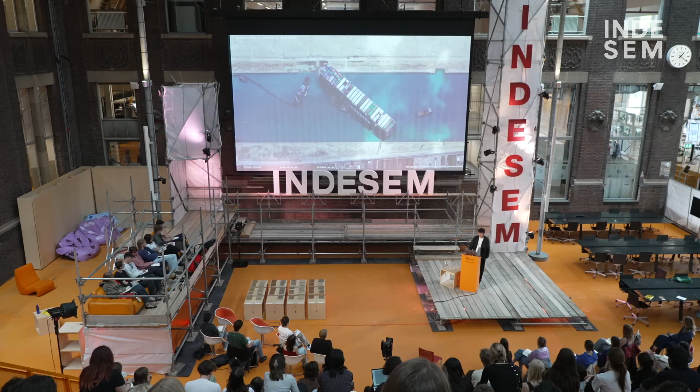So that day, because of the wind, that boat rotated, pivoted, and blocked the canal. It blocked the canal for 6 days. And every day the boat was there, $10 billion of the global economy was paralyzed. I think this is important because it shows to what extent we are vulnerable and exposed to a planetary condition of the market.

It's quite crazy if you think about that, right? So all this waste, spatial waste, is not intentional. They are externalities. Externalities, that is, indirect consequences, negative consequences that happen when you want to achieve something. When you want to do a production process, and in the middle of the way, you generate things that you don't want to generate. This is our externalities, far beyond the globe of the Earth.

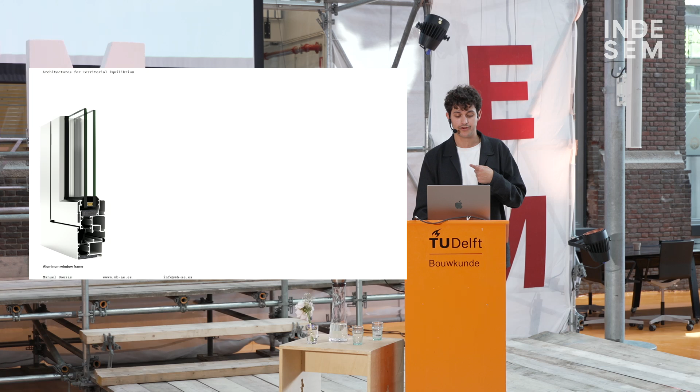But today, externalities characterize in a way the construction industry, an obsolete construction industry. For example, you probably know this—this is an aluminum frame. In all Europe, we have a lot of aluminum window frames. But what you probably don't know is that for every kilogram of aluminum that we generate, we're producing 2 kilograms of toxic waste. This is another externality.

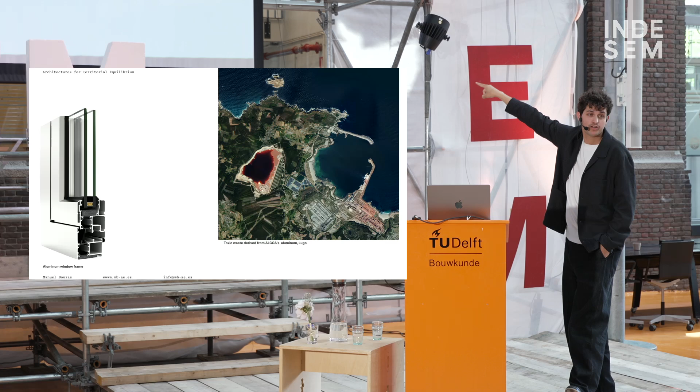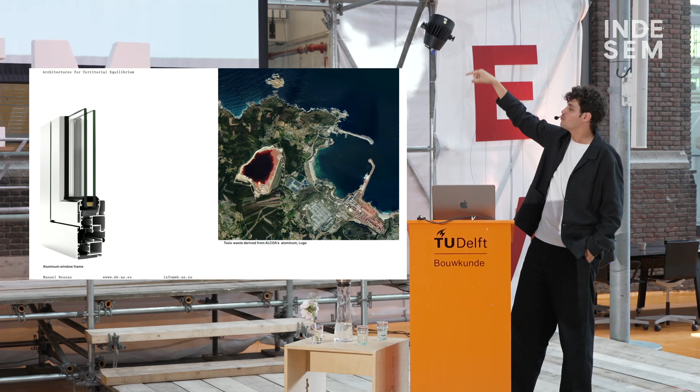And this is something that is very close to me. I come from Galicia, north Spain. This is the factory, the biggest factory of aluminum in the region. It's called Alcoa, that right now is decommissioned. And you can see how the size of Alcoa is as big as the size of the externalities this factory generates. This is a red pond with all the toxic waste, 2 times the weight of the aluminum, that is there. And nobody is going to remove it from there because it's super toxic.

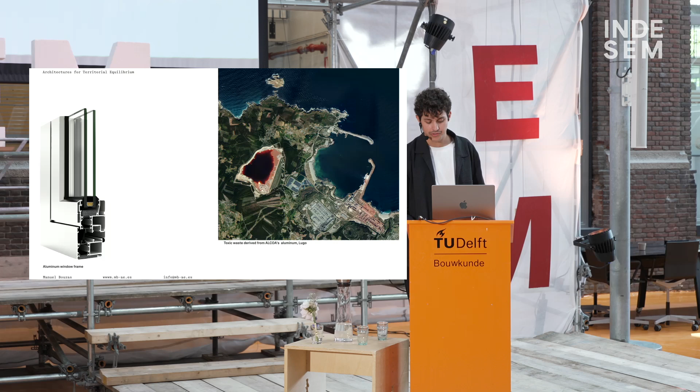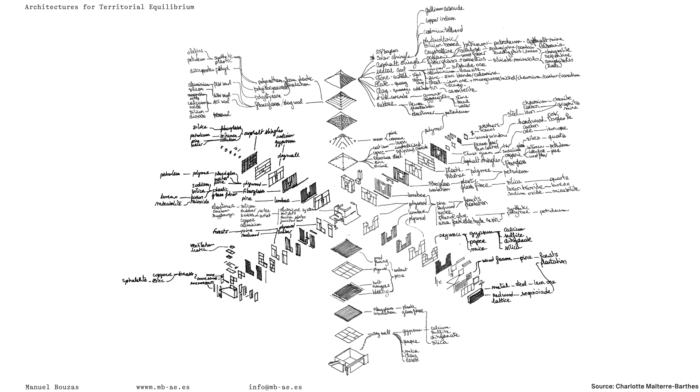This is the externalities that we produce in the construction industry. I love this drawing by Charlotte Malterre-Barthes, a Swiss architect, that in a way asks, at what moment did we arrive at such a complex construction industry? For designing a house, you have to rely on such a big amount of materials, a lot of layers, super complex, super technical—for the thermal barriers, for the waterproofing, for the insulation, et cetera—that makes this industry extremely complicated.

So if this happens with aluminum, imagine what happens with any other single material involved here: steel, concrete, glass, plastic, et cetera. This is a production process that is extremely opaque, extremely black-boxed, and super difficult to trace back and to analyze. And this is the context where we have to intervene.

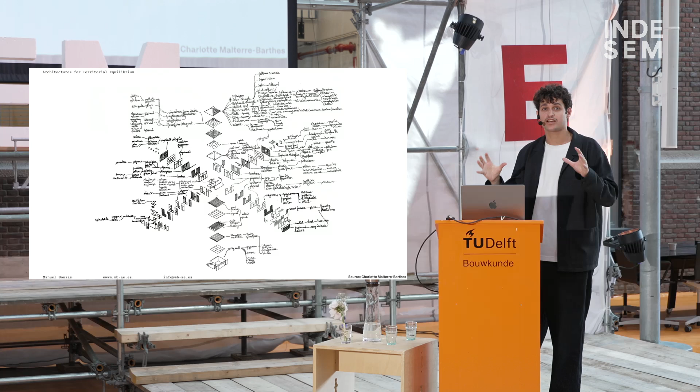There are the externalities produced when we extract materials in a violent way, when we burn energy that is imported from elsewhere—this is the most pollutant factory in Spain, which is in Galicia again. The labor, when we displace this labor to the other side of the world, those people that build our materials, where we build with, or craft the clothes that we wear. Or even the residues that we generate through the demolition process, or finally, the emissions, which is the last consequence of all these impacts. And that makes us live in a moment, a historical moment, of climate crisis that explains where we are here today.

And this is the future, right? By 2050, we'll be generating between 44 and 53 billion tons of CO2 emissions, and at the same time, there will be 10 billion people on the planet.

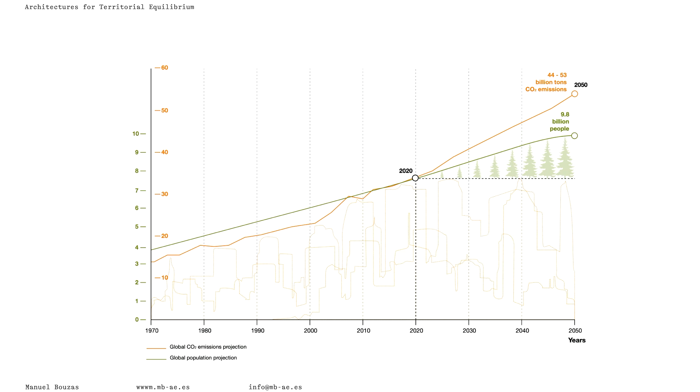And if you cross paths, you will see that that triangle is an area of opportunity. We need to build more, right? There is a pressing necessity of building more housing in the cities, and we have to do it in a way that we curve this emissions curve back again.

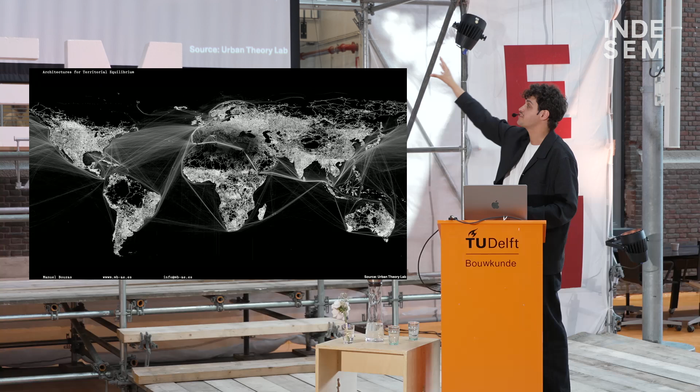So it's not only about talking about net zero emissions, it's about talking about positive impacts on the environment. How can we create buildings that serve as carbon depots, in which way we can absorb more emissions than we release. So in a way, there's an opportunity here to understand planetary urbanization like this, extremely complex, extremely hyper-connected.

And the way of doing it is looking to what we have available locally, immediately. So if we erase or turn off that layer of connections, we will see that every single country in the world has their own resources, their own material palette, their own intelligences. And it's a responsibility, it should be in our agenda to mobilize that.

So in a way, we should talk about the contrary to the externalities, which is what we define as internalities. So instead of extracting materials violently from elsewhere, we should think about harvesting them.

And this connects in a way with the timber industry that spans 30 years long, but can provide a regenerative material that can substitute concrete or energy. Instead of burning it, generating emissions, we capture it with wind, water, and sun. And this is what is happening today in Spain, with a major energy hub, or labor.

Instead of displacing it to the other side of the world, what if we support them? All these people that work with earth, ceramic, clay, like you have been doing today here. Or the residues—what if we start to think not about recycling, but upcycling, bringing more value to what is considered waste? Or finally, the emissions—what if, by working with what we have available, we can actually reduce emissions in certain places?

And this is what internalities is about. It's a word that does not exist. You will not find it in the dictionaries, but we propose that it should be interesting to consider it in our vocabulary. And we define it this way: an internality is this boundary system where the arrows, instead of going outside the ecosystem, are going inside.

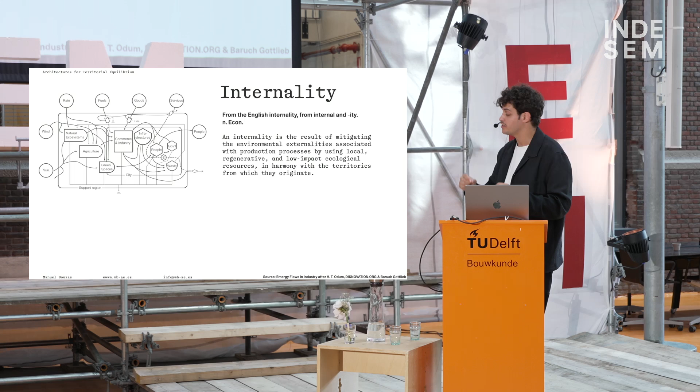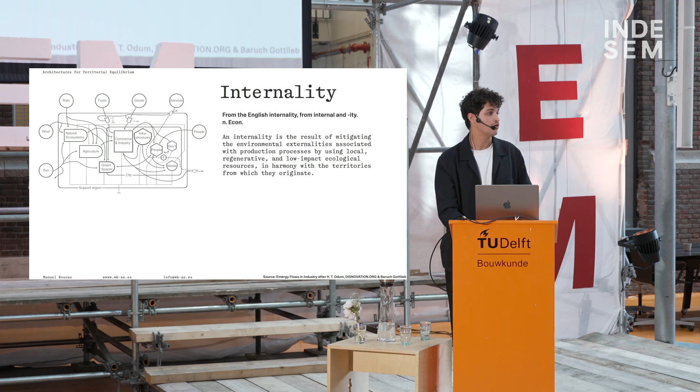So an internality is the result of mitigating the environmental externalities associated with production processes by using local materials, regenerative materials, and low-impact materials in harmony or in balance with the territories they come from. And this is, in a way, the goal.

So I'm going to present today 5 projects that are addressing that question, right?

This one is internalities, which is the Spanish pavilion at the Venice Biennale that we opened 2 weeks ago. 2 weeks ago, we were there with all the participants, 50 participants, architects, photographers, researchers from the north, east, west, south of Spain, and we were celebrating the culmination of 8 months of work trying to define that word.

This is a work curated by me, of course, but also my colleague Roi Salgueiro, and I want to thank him for the hard work all these months. And basically we wanted to address or to represent how Spain is doing things differently.

So in a way we collected evidence to demonstrate that this word makes sense. And we selected 16 projects made by architects from Catalonia, Basque Country, Madrid, Balearic Islands, Galicia, Andalusia, etc., that support our thesis. This is our evidence. This couldn't be made 5 or 10 years ago because this evidence didn't exist.

And here you can see buildings made with wood, with timber, with stone, with earth, even with recycled materials. For social housing, for landscape architecture projects, for renovation of chapels, for public buildings, etc., etc.

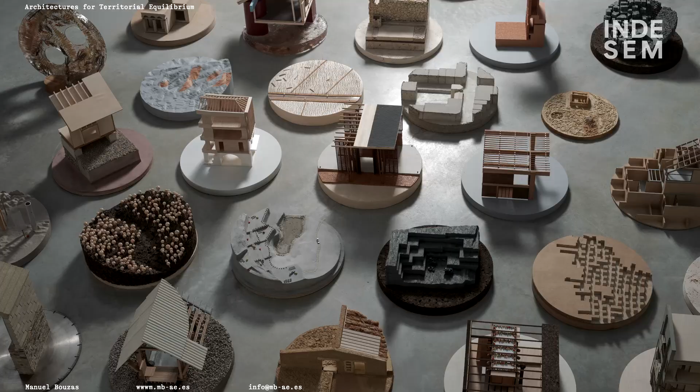And they knew how to do it, that's easy. But we asked them about the other model—the model of the landscape where this material comes from. And they were like, well, I don't know. I more or less know where it comes from, but I'm not really an expert on this.

So we asked them to try to be an expert, to do a model that represents the ecology that takes place in that territory. So after a lot of research, they created the models of the quarries, the forests, the soils where these buildings come from. It was an incredible experience.

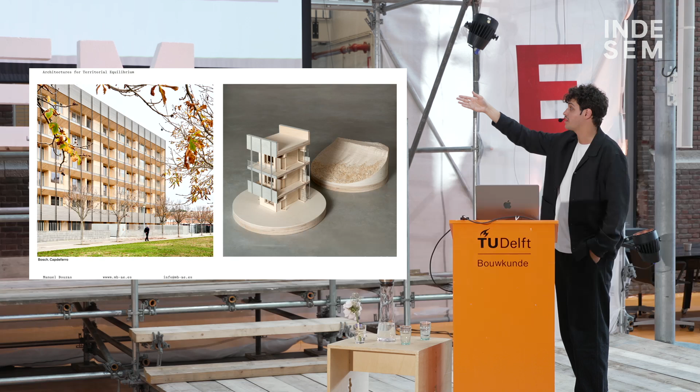Because we have projects like this made with mass timber, like Bosch Capdeferro, social housing, and they have the model of the tectonics of the mass timber, but also the models of the forest where this timber comes from in the Basque Country.

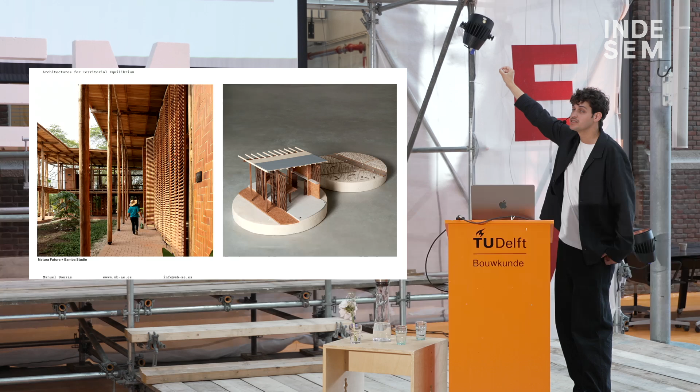Natura Futura and Bamba Studio created this cultural hub in Ecuador. They are Spanish architects operating in South America, working with raw logs. They represented both the tectonics and the forest, extremely close to the building, of wetlands, where these trees are cut. Then there are people that work with earth.

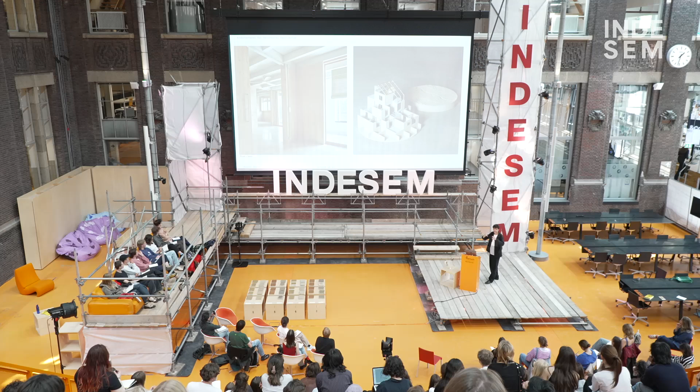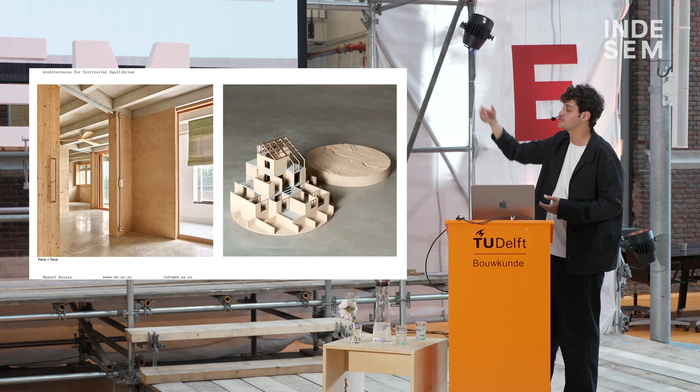This social housing project is made with compressed earth blocks, called Pet de Terra. The architects represented not only the units that define this housing spatial thing, but also the river that delivers that clay, that earth, that allows a new industry to be possible. Earth that sometimes comes from the very place where the building is located.

And this house is made with another type of rammed earth construction, where the earth is directly excavated from the plot. They actually represent both things. Or a stone — it's not only about architecture.

There are people working at the scale of urban design too. These architects, Branco del Rio, created a carpet, a plaza, that connects the different villages in this town in Portugal. They represent carefully that village, but also the quarry where they sculpted all these pieces.

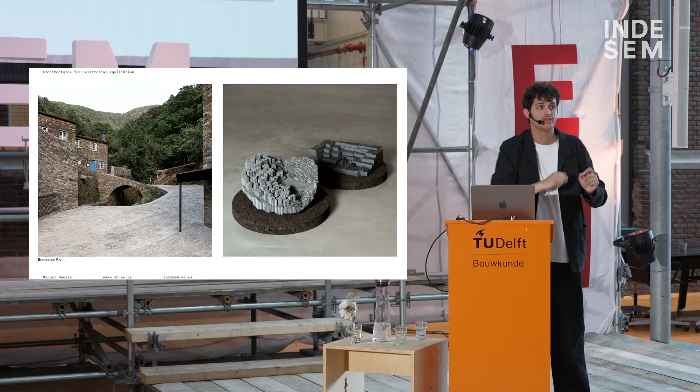Or this chapel, about completing a ruin that was there in the north of Spain, in Zaragoza. These stone blocks are cut digitally with robots, etc. They got the saw that cut the blocks and brought it to Venice. That's where the model is located.

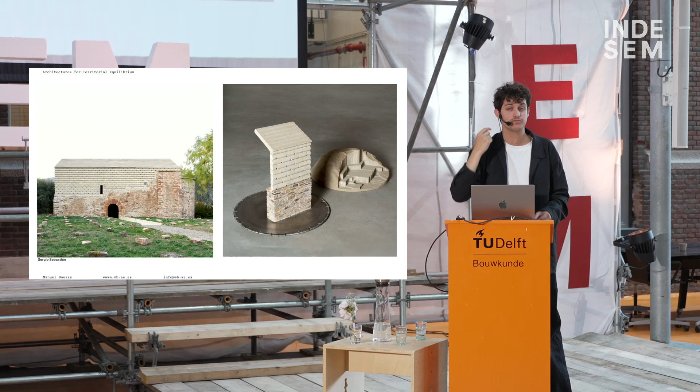And the quarry — they had no idea how to represent it. So they went to the masons and asked them, can you actually sculpt it? They have the quarry in the back of their heads, they know their landscape, so they actually sculpted it and gave it to us to bring it to Venice.

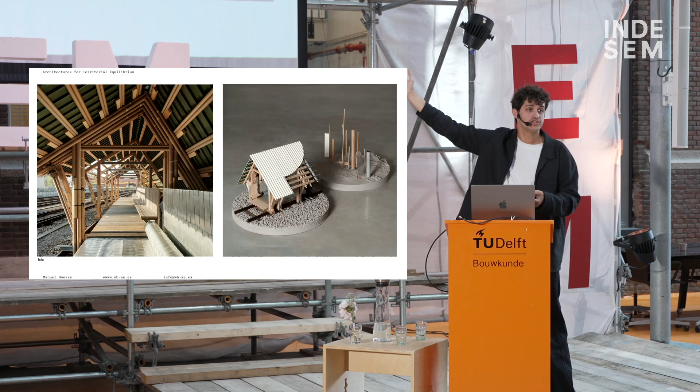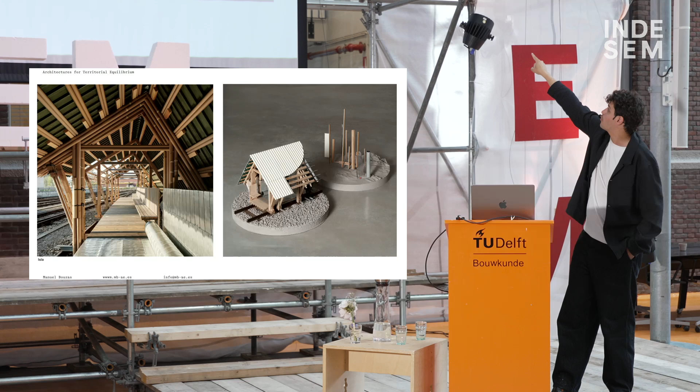Or this one, that is about recycling. This is a heterogeneous construction made with cardboard, steel, wood, made by Isla in Switzerland, Spanish architects operating outside. They represented it with the territory it comes from. In the Alps, in Switzerland, they put every single material from the exact place where they sourced it, from all those depots in the metropolitan area of Basel, with that red dot, like Google Maps, saying hey, the project is located here.

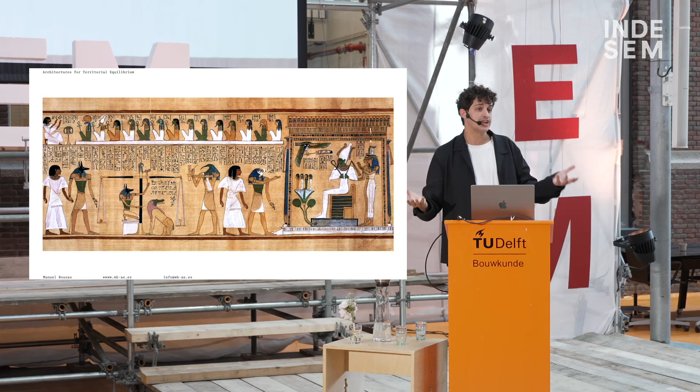And how to present both models? This is where we came up with the idea of the balance, the Egyptian balance, that for many millennia was a symbol of balance, equilibrium, but also justice. This was the message we wanted to deliver in Venice: environmental justice. So we designed our own scales, made with timber, presenting two plates for the two models.

We built 16 of these scales, extremely big — they were like that, very intimidating. They presented both models, delivering a message: the space we construct is as important as the space we deconstruct. We, the architects, and all the building industry, should put the same care and attention in both things. Models were located on their plates, and people could actually look at them 360 degrees, from every single angle.

And we tried to work in the same fashion. If we are asking them to work this way, we should do it the same way. All the wood, all the timber we used for those scales, sourced from a very special place for me: the common lands. Common lands are Galician forests that occupy like 20% of the territory, managed by rural communities that take care of their forests.

We asked them, can you give us 3 trees for the whole exhibition? And they said, of course, it will be an honor. So we asked them to give us those trees, and we documented every single step, from the cutting of the tree to the manufacturing in the factory, to the carpentry moment where these scales were assembled. So we perfectly knew what trees we used and who was behind it.

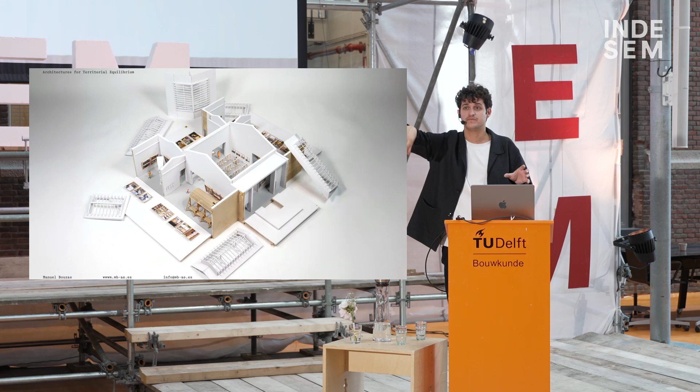But the exhibition was not only about that. We had 5 other rooms surrounding the central room with the scales, and we delivered some research projects. It's quite cool to understand an exhibition, a Venice Biennale, as a platform where to deliver some research, to create some knowledge that didn't exist before.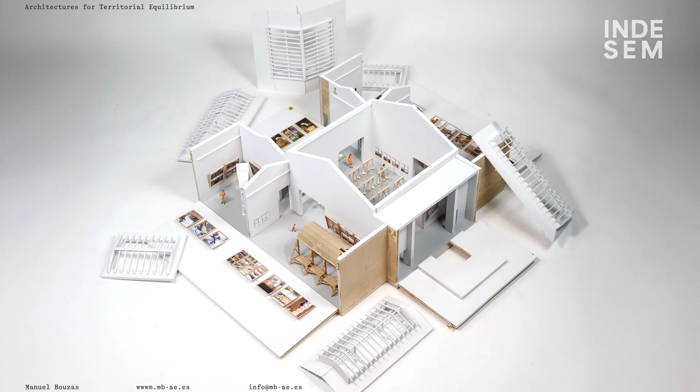So we selected 5 teams to present a research project connected to a specific region of Spain - Balearic Islands, Basque Country, Madrid, etc. - working with only one material. Tell us about those landscapes. Tell us about those processes.

So the first team looked at the timber industry in the Basque Country that is fueling a new paradigm in construction in Spain. Mainly, most of the timber buildings you'll see in Spain come from here, from the Basque Country. They presented totems investigating advances in the future of this industry, and a visual essay documenting all the steps necessary - it starts 30 years ago when you plant these pine trees, how you cut them, how you create these CLT panels that culminate in all the buildings I showed you.

The second room was about the second axis of externalities, the energy. These architects, Star and Luis Diaz, created a model of a river. Have you ever seen a model of a river? It's not just a line, it's a lot of complex lines. Their main argument is that this river in Galicia is not just a natural ecosystem, it's an energy ecosystem.

An energy ecosystem that 50 years ago looked like this - this is that coal factory I showed you in the beginning, the most pollutant factory in Spain that today is decommissioned. If you go to the origins of that river, something is going on - this is where the river starts, and you'll see that wind farm on top of the hill that speaks to this energy ecosystem. Downstream you'll see hydroelectric dams that generate more power than they consume. And finally we go to the third room, called labor.

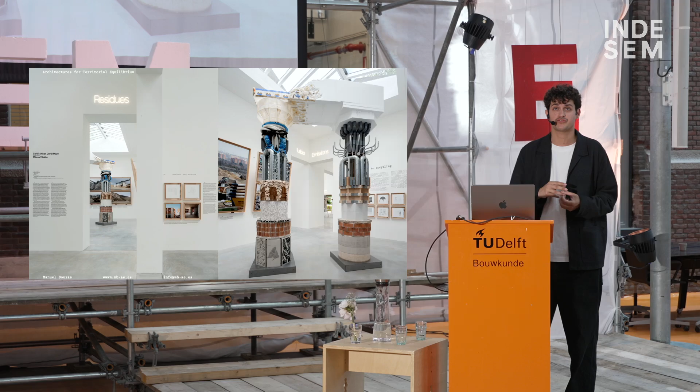The fourth room was about residues, placed in Madrid. Lucas Muñoz, who is not an architect but an industrial designer, said one very interesting thing: what if Madrid, which doesn't produce any resource, what if we talk about recycling all the waste we produce? So they created this ornamental, postmodernist, very funky portal, and made this big statement - this is ornament and detritus, like the Adolf Loos essay.

They presented all the detritus collected from the streets of Madrid, where speculation is taking place. It's very frequent to see these containers full of waste, and every day they were selecting materials to build that ornamental door. They visited all the places connected to our recycling industry - places that are very dirty but necessary to analyze, to see how we transform all those things to make it possible.

The last room, concluding the Imaginaries project, is about emissions, focused on the Balearic Islands. Imagine if this is difficult in a European context, imagine on an island. These guys, known as IBAVI for the last 10 years, have a presence in El Croquis magazine. They've been looking at what they have over the last 10 years and discovered an amazing amount of materials there - stone, earth, timber, etc. - and they have to work in favor of those materials, not against them.

So this led them to the point where they are working with arches and vaults and an architecture that speaks about solidity, weight and gravity. Why?

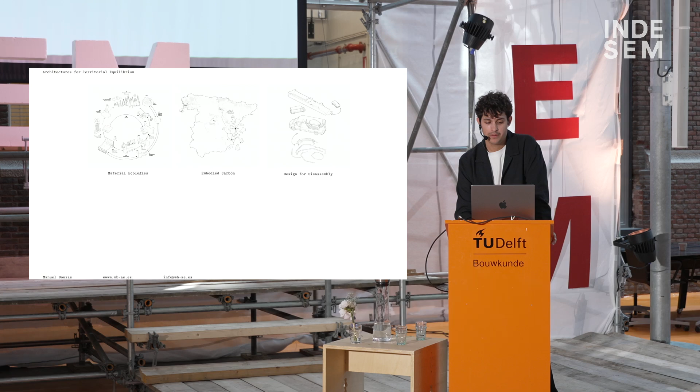But at the same time, I think it's important to consider other things. In my work, you'll see that it's important to reactivate public space, to experiment with new structures, and to design through making. I've been involved with my hands in many of them.

This is the place where I used to work, this workshop, before I moved to the US. It's quite cool to fabricate with your own hands all these things. This is where I developed my passion for wood and timber.

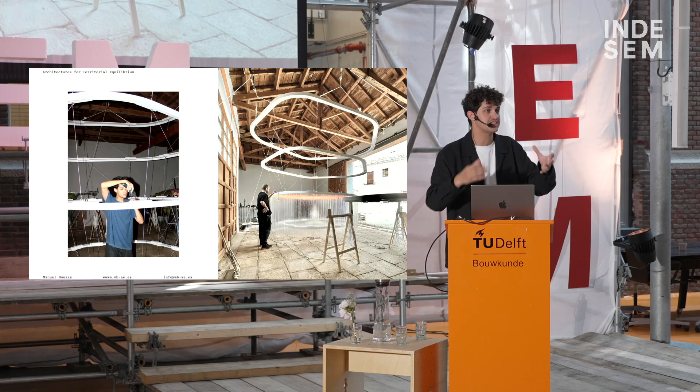We started by doing very small projects, with very little resources, when I was a student, working with my friend Santiago here in that workshop with our own hands. We crafted this lamp that was installed in the courtyard of a monastery in Catalonia.

Or working with recycled elements sometimes, like these red plastic cups that we gathered in Mallorca, and we created three catenaries that filled the space of another palace in Mallorca.

Or furniture—we designed furniture made with wood, again for a palace, in this case in Rome, in the Villa Medici. Furniture that can be used in many, many ways.

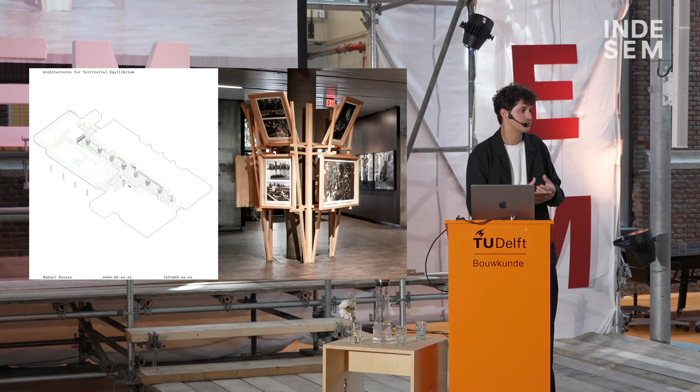Or even exhibitions that have to do with timber and forest, which is something I'm very passionate about, that we presented at Harvard. But I'm going to focus on three projects I've been doing in the last years, extremely quick, that in a way embody all these questions I want to address.

So the first one is the Mediterranean Pavilion that was built two years ago in Valencia.

It was built in this square, an obsolete public space, the result of a demolition, and there was absolutely nothing there—no shadow, no benches, no vegetation, no water, nothing. The question the festival prompted was an open call, a public competition, asking every single young architect in Spain: what can we do here to transform this space into something alive again?

So I started to become obsessed with what they already have. In Valencia, they have these beautiful Mediterranean shutters—that's what gives the project its name—very characteristic of the Mediterranean basin.

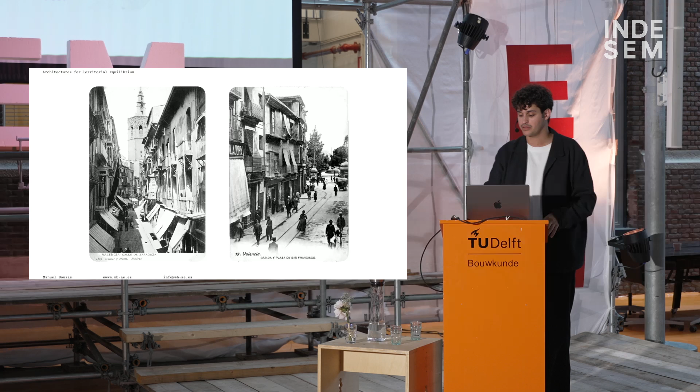It's not frequent to see them today, because right now we rely on fan coils and things like that. But traditionally they were used to protect you from the sun while allowing cross ventilation. We became obsessed with this material because it's actually produced there—in Valencia, they produce 90% of the shutters that get exported to the whole Mediterranean basin.

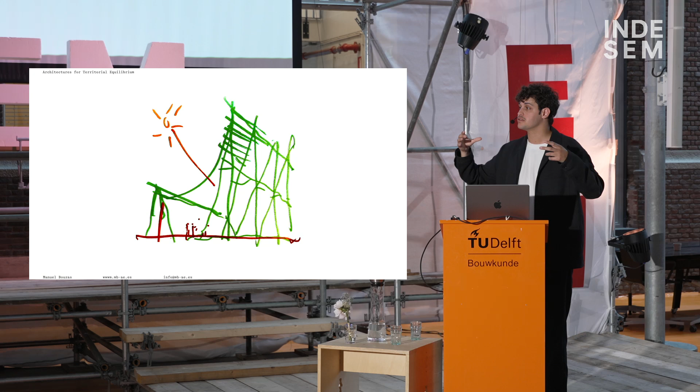The question was, how can we upscale this idea and make the biggest Mediterranean shutter ever—a shutter that can cover a whole plaza, moving from the scale of the window to the scale of the plaza. We represented it with a model that speaks how ideas can be upscaled from the window to the facade to the plaza.

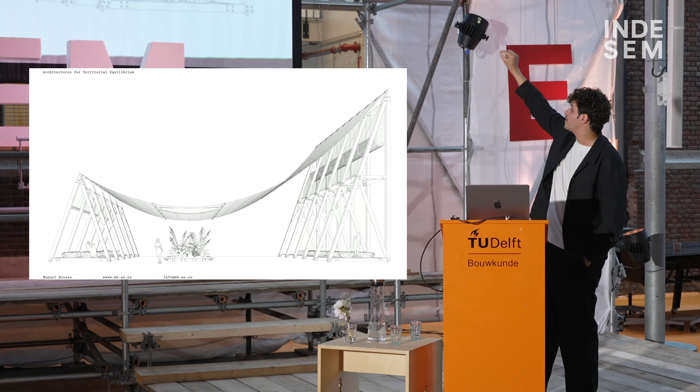And again it was this idea of the catenary, a lightweight structure that hangs from two wooden porticos and casts this immense shadow on the plaza, 300 square meters, where people can develop other activities and come together as a community.

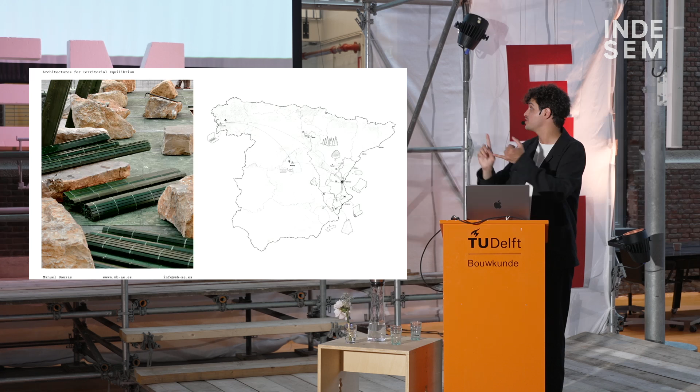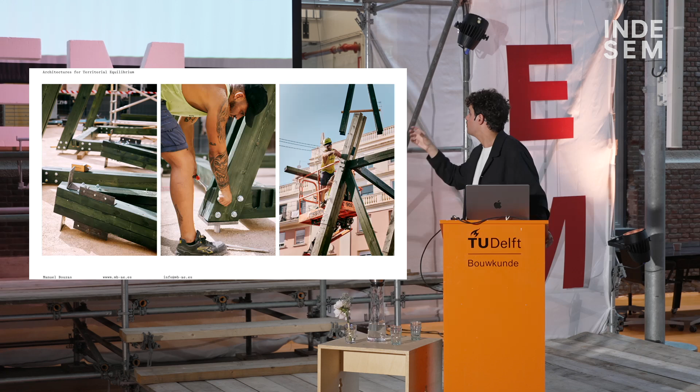We sourced all the materials—the shutters, the stone, and the timber—from just 300 kilometers away. I put a lot of emphasis on being scientific with this, and everything was designed for being disassembled. In only 2 weeks, we constructed this pavilion using only timber and steel connectors.

Some moments like this one, the stone floating there. And this is the result: a big canopy that covers the entire plaza with rocks that structurally balance the weight of the catenary, where people can gather as a community.

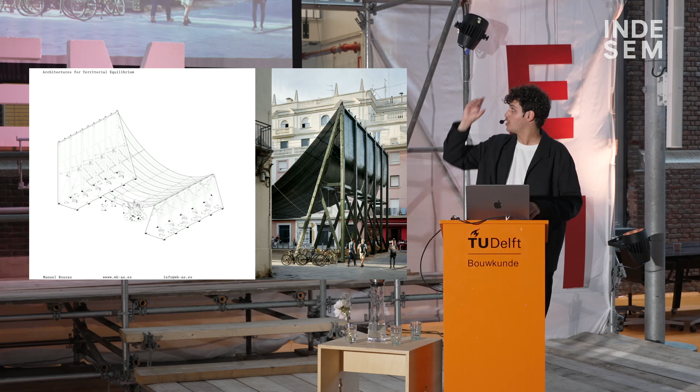They can sit there and enjoy a good climate, because it's extremely warm in Valencia in the summer. It constructs that facade in the street at the level of the adjacent buildings, where people can freely occupy this space and make it their own.

They were doing talks and conversations, parties, even a band. I love this picture because the band is wearing green caps in honor of the green color of the project. But there was one problem here—I did my carbon calculations and realized something.

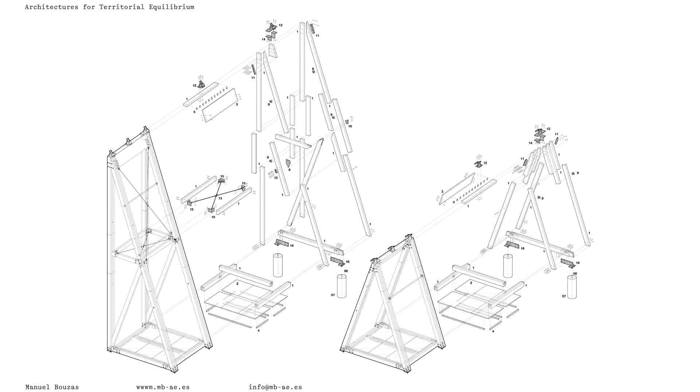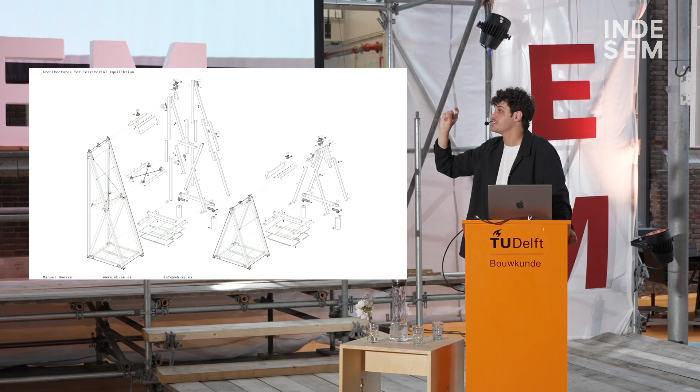All the CO2 emissions we absorbed by using timber were offset by all the emissions released by the steel connectors, these dark gray things. These little things release as much emissions as we absorb with timber.

This was probably the most beautiful place I've ever been—another gift of life. They asked us, for another festival, to do an installation in one of these gardens. There are 16, designed by Ferdinando di Medici 500 years ago.

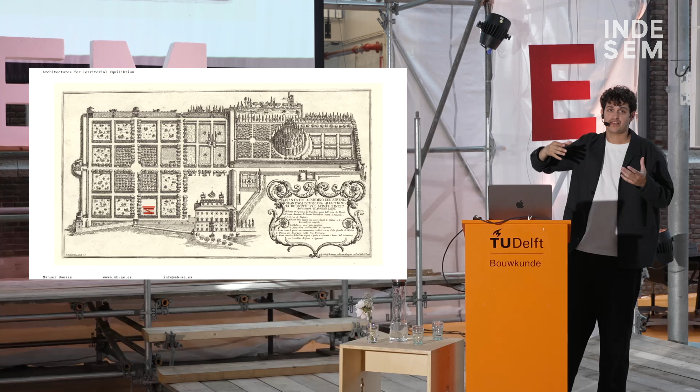In these gardens they used to cultivate all the food and necessary products for life in the palace. When you look at the maps you can see these 16 square gardens, but when you go there, you never see that—you never see the ecologies of the palace.

They are neglected because the bushes surrounding the gardens are super tall. So when I was there I thought, what a pity—it would be incredible to look at this from above and understand how the ecologies of the academy operate.

So we created an observatory with the same structure as the other pavilion, one that mediates between the city—you're in one of the highest places in Rome, so you can see the whole city—and at the same time you can see these gardens from above for the first time in history.

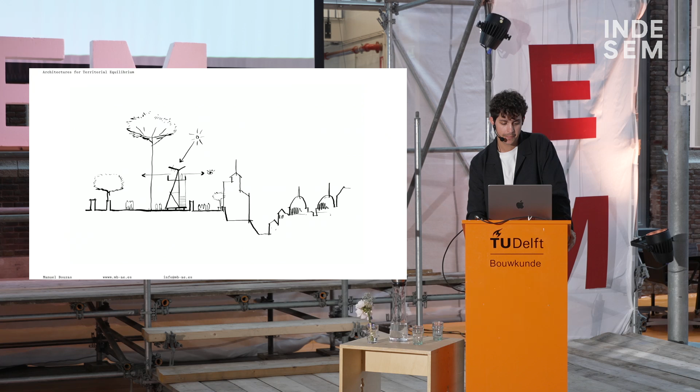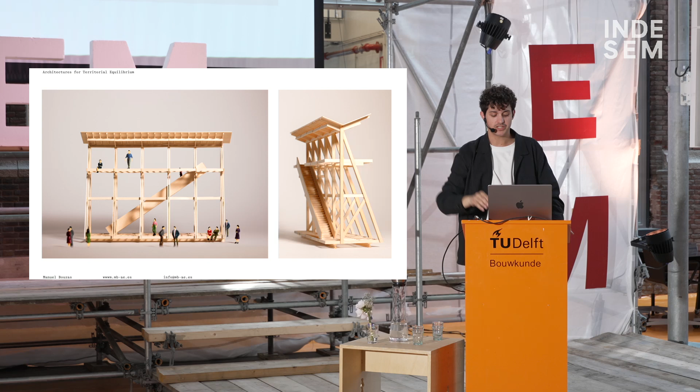We did the same structure again, but without steel connectors, only joining timber with timber. It was more challenging structurally, but we got it. This diagonal staircase brought people up to the observatory. We made everything in 5 days, half the time of the previous project, just working with timber.

And this is the result—an observatory placed in one of those gardens, looking at both conditions at the same time.

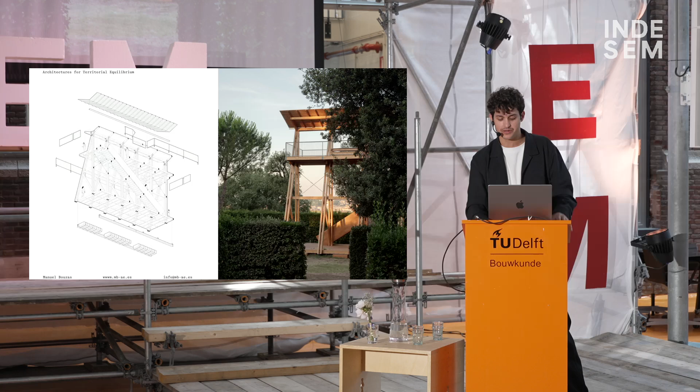The observatory has this butterfly wing-shaped canopy that casts shadow during the summer, and people had to find their way into the project because it was hidden in the forest, with tectonics that resemble the previous project, and a staircase that leads you up where you can see the city of Rome.

This is a drawing of the tectonics, which is something I love, and you'll see that in every project I do. And here's the view—the gardens for the first time from above.

Again, this is a place for the community, for the people who live there, and it will serve as a stage for the whole summer, where people did performances, songs, and concerts. Every single building has an urban impact on where it's located.

I'm going to present the last project, which is about to open next week, so it's quite confidential. But I'm very happy to present it here for the first time, which is called Atlas. This is in Portugal, another festival about to open, in the city of Braga in the north of Portugal.

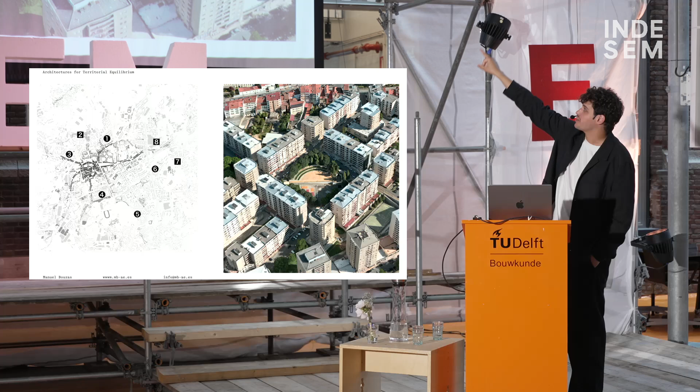They are working in the outskirts of Braga, where massive neighborhoods were erected in the 70s—super tall, super tough, with not much life there. They wanted to revitalize the hinterland of the city by doing some installations there, so they invited 7 Portuguese architects and me.

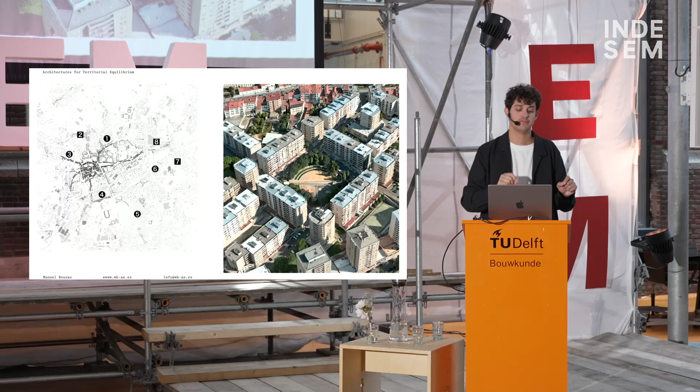I got obsessed with this ring in the middle of the circular plaza that is absolutely forgotten or obsolete—call it whatever you like. Nobody uses it. It's old-fashioned, it's dirty, it's destroyed, and it hasn't a roof. So the question here is, what can we do here?

I got fascinated by this sculpture called Atlas, the person holding the weight of the world, and it's a fountain. This is what gives the name to that neighborhood—the neighborhood of the fountains, because of that sculpture.

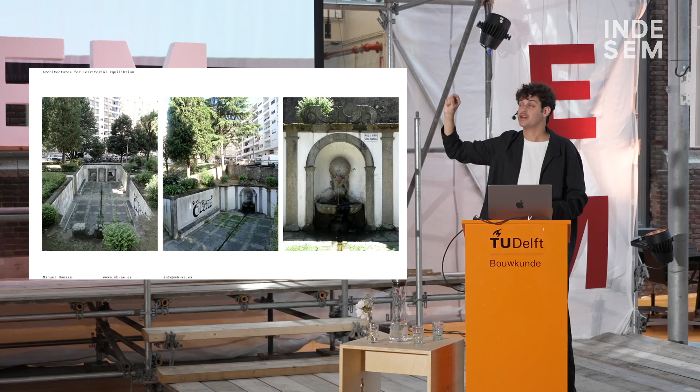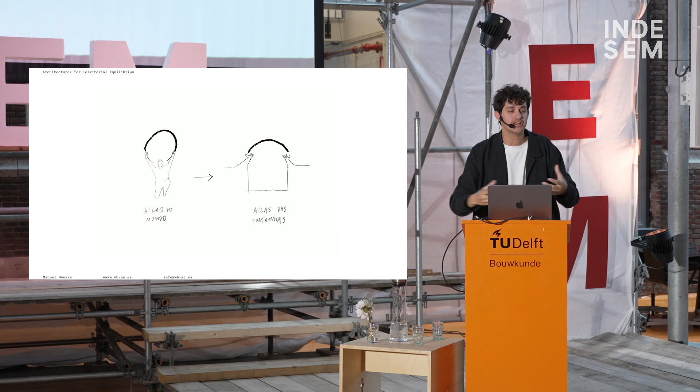So I wanted to do a provocation: if this person is holding the weight of the world, what if the ring was holding something else—a canopy that could create something special in this ring? The idea was to create a vault that transforms this into a cultural space where people will gather together again, trying to reactivate their community.

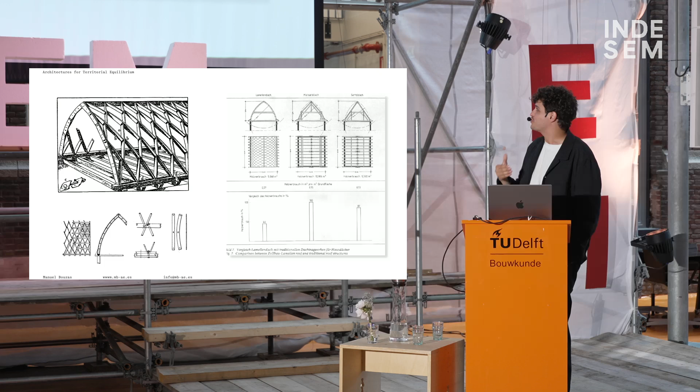So I wanted to understand how it's built. We created this vault that floats over the ring with the lamella system, and it actually spans beyond the footprint of the ring. It's built in two ways: on one hand, this timber structure; on the other hand, the metal substructure.

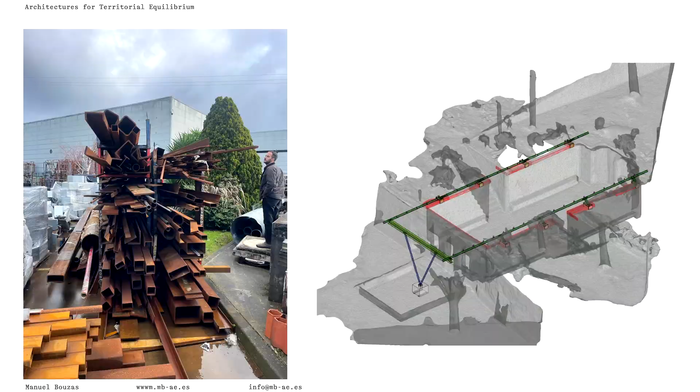The wooden structure has plywood panels that provide the shade for the roof. They're cut from CLT panels from Galicia, from those same forests I told you about earlier, and joined in a very complex way where every single cut has to be digitally fabricated. The metal part was made reusing all the waste the contractor had in its own factory, so this metal substructure is hybrid—a Frankenstein made of different profiles, because we wanted to use what was available there.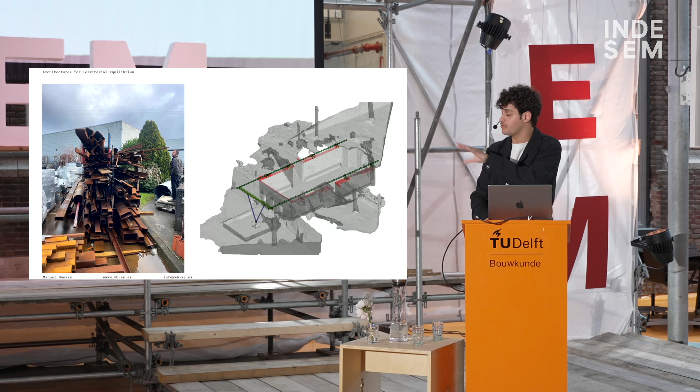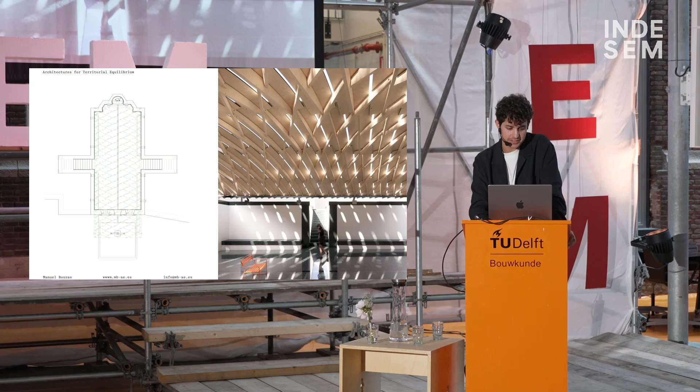This is how it looks. In one week, it's going to be real—this vault protecting and sheltering that Atlas monument. It's a space where people will do a lot of things, from parties to summer cinemas to popular lunches, etc. I love this idea of the arc and the fountain.

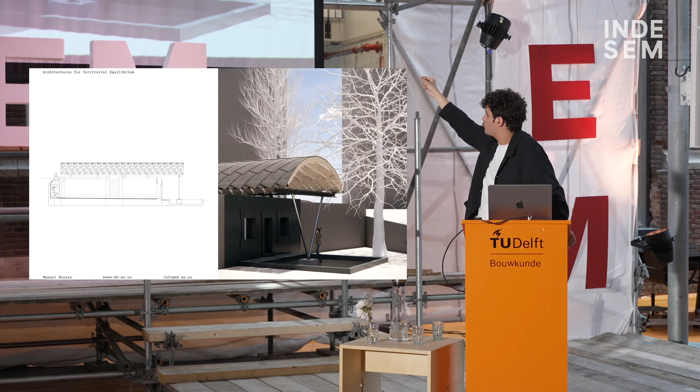It's running over the ring, supported by this V-shaped structure in the middle of the pond. It's already in construction, and it's quite fun to see how it's evolving—you're using it piece by piece, and it's growing and growing. Every day I go there, the structure is bigger.

This is more or less the point where we are right now. All right, I conclude. Beyond practice, I'm also an educator—I teach at Cornell in the United States, at this university designed by Dutch architect Rem Koolhaas, where I try to share this agenda with the students there.

All of them have participated in the projects—I try to work with them, and they have performed very critical roles in terms of design, production, etc., both in this project and in the Spanish pavilion.

I trust in this idea of learning through making with them, and I want to teach some of these things. I have this seminar called Internalities, like the Spanish pavilion, where I ask students who come from different places in the world—India, China, South Korea, etc.—to apply the same methodology in their own regions.

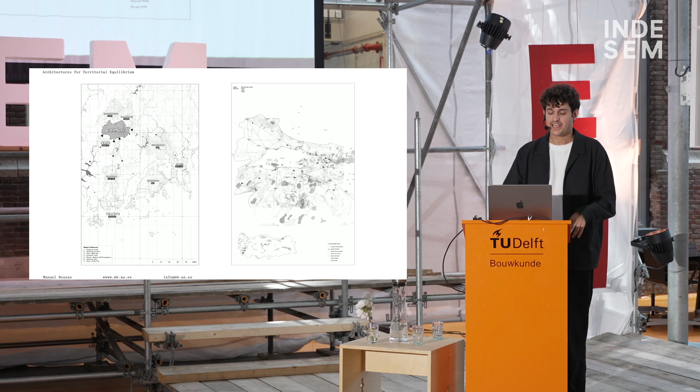I invited many of these lecturers to talk at Cornell, and I asked them the same exercise. They were mapping their own territories in Korea, in India, in China, understanding the flows of resources, who is involved, what type of industries are involved, developing their own tectonics. Very uncommon, very original, because they are working with what is available, arriving at different typologies.

This is the same house, but made with different regional resources, from India, from Turkey, etc. And this is sort of the attitude I want to share with them.

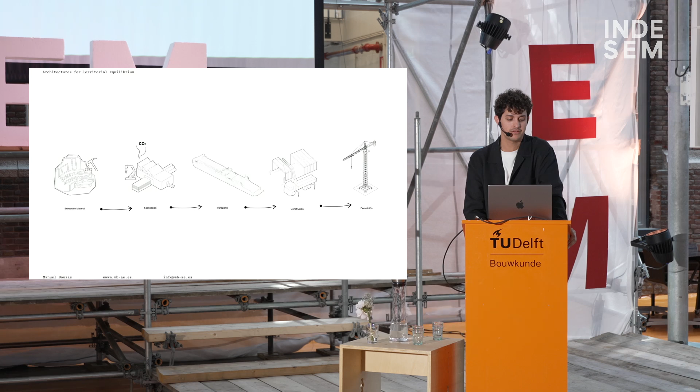I finish with three ideas or conclusions. One is that to move away from an obsolete industry requires us to consider the full life cycle of buildings, before construction begins and long after construction ends. This is what an obsolete construction industry looks like: we extract things, we manufacture, we transport, we construct, and we demolish. And this is where we have been educated for many years, in designing an object.

But what happens if we think about what happened before, much before the design starts? And what happens if we start to think about what happens after?

The second idea is that moving away from an obsolete industry requires us to mobilize the resources and intelligences embedded in a given place, in a given territory. One of the things we presented in the Spanish pavilion is, for the first time, a map of Spain with no political boundaries—we delete them—no road network—we delete them. We just presented all the resources available there: all those landscapes, forests, quarries, soils necessary for the decarbonization of a country. This is a map we gave to every single architect in Spain to start the project by looking at what they have around them. And this is something that could be exported and expanded to every single country in the world.

And the last idea, and I finish here, is that moving away from an obsolete industry offers an incredible opportunity to try to downscale this planetary urbanization, and to balance the economies of construction with ecologies of production. And this is the video that we presented in the Spanish pavilion.

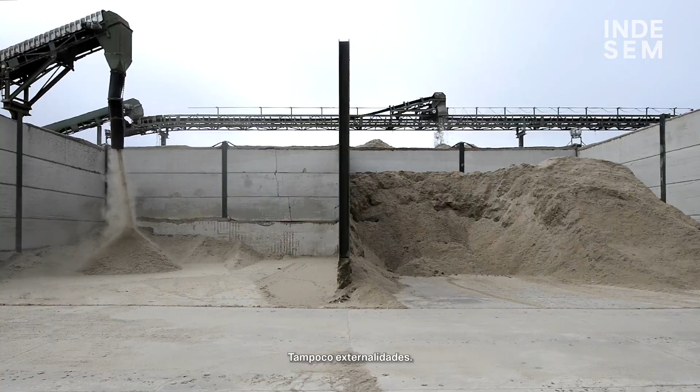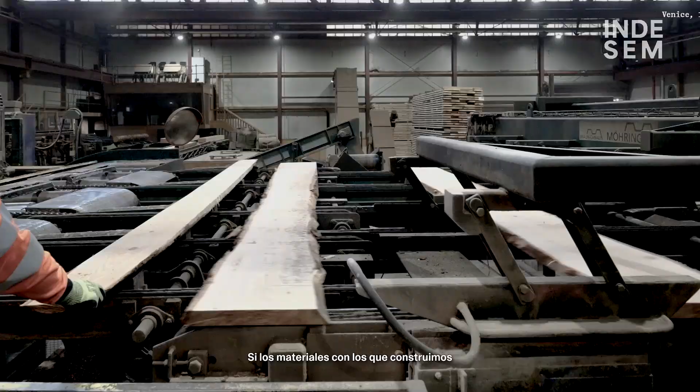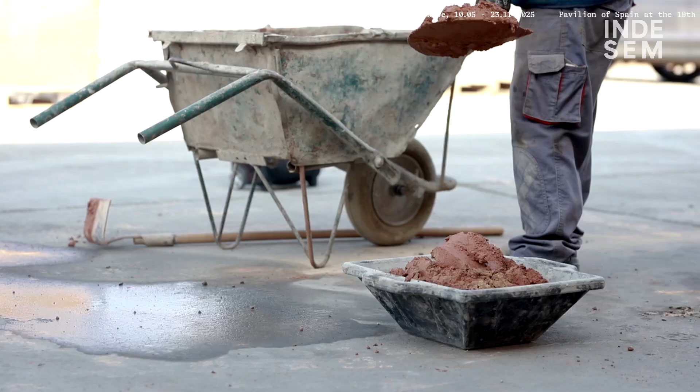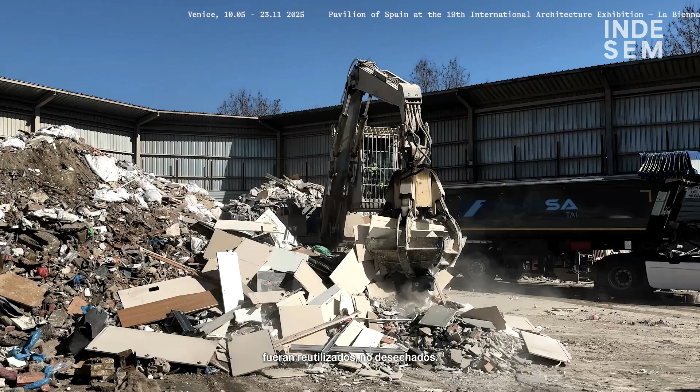Nature produces no waste, no externalities. Every material flow is internalized in a continuous cycle. What if architecture followed the same logic? If the materials we build with were harvested, not extracted? If the energy we consume was captured, not burned? If the labor we depend on was supported, not displaced? If the residues we generate were upcycled, not discarded? And the emissions we produce were prevented, not just released?

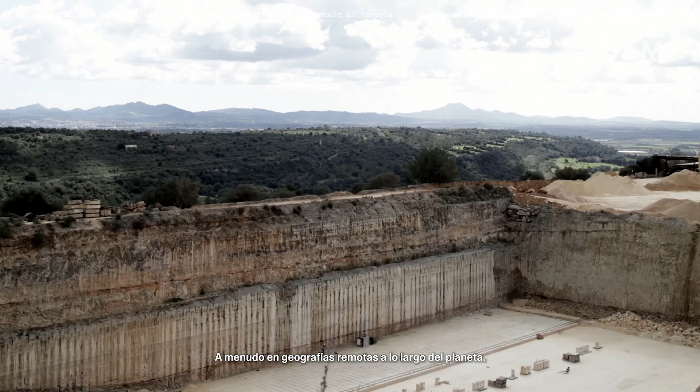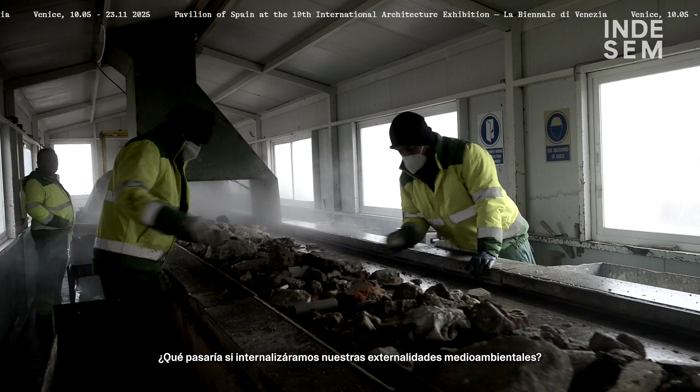Every time we construct a space, we deconstruct another, often in remote geographies across the planet. New times demand new design responses. What if architecture were constructed in partnership with the land? What if we internalized our environmental externalities? We invite you to think with us: how can we balance the economies of construction with the ecologies of production?